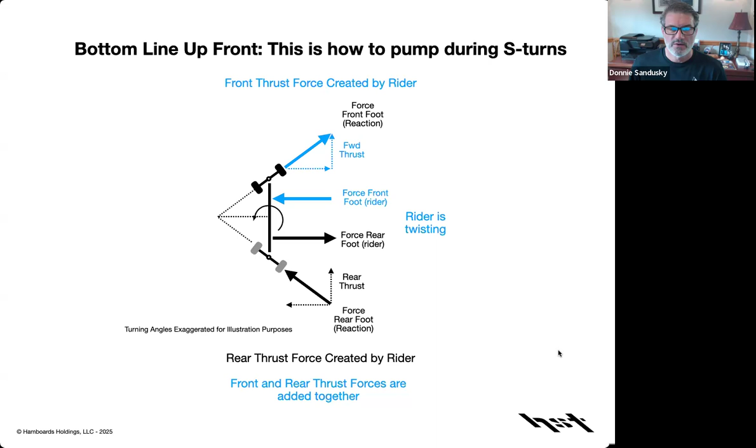This presentation is the physics of flow. Let's get on with it. How longboard skaters generate thrust without foot pushing. The bottom line up front is that during S turns, the rider pushes in opposite directions with their front and rear foot, basically pushing that truck in the direction it's already turning in opposite directions, resulting in a rear thrust and a front thrust, which are added together, which propels the rider forward without foot pushing. But the rider has to be twisting.

To define a few terms, longboards are specialized skateboards that the rider can turn by leaning without the need to lift the front wheels off the ground, like with regular skateboards. I know you can loosen up regular skateboards and turn them, but just bear with me. Longboards are considered counter-phase turning mechanisms.

Here we consider three center of turning categories: centered, back foot, and rear axle. That means, where does the board actually turn? What is the pivot point of the board as you're riding it? This correlates to different riding styles: centered carving, back foot carving, also surf skating, and pumping.

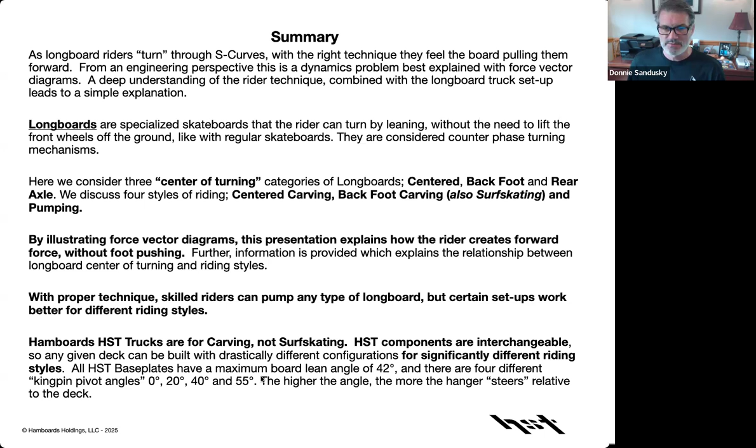Okay. I'll show you some force vector diagrams. I'll show you about the technique, and I'll talk about how the HST truck system, which is designed for carving, not surf skating, all the components are interchangeable, and you can try all these different riding styles.

Centered longboards, the midpoint of turning is at the middle of the wheelbase because the front and rear turn equal and opposite. Back foot longboards, the center of turning of the system is underneath the back foot because the front turns more than the rear. The rear axle longboards only turn in the front, so the center of turning is right on that rear axle.

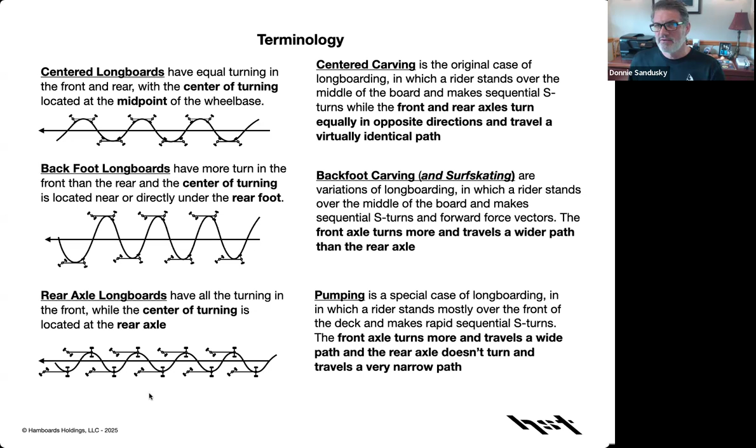And these three different types of longboard setups correspond to centered carving, to coin a phrase, back foot carving, again, coining another phrase, also surf skating, and then pumping, where the front of the board does all the work. You can pause this if you like to read the details, but I've tried to organize these different styles in terms of mechanics, stability, technique, and feel.

Long story short, center carving is what Hamboards have always been. I have seen people crush pumping on our centered carving boards without having a foot push. They're insane. Back foot carving is where the front's turning a lot more than the rear, and so the front of the board is taking a wider path. Pumping is standing right on the front truck and just making it go.

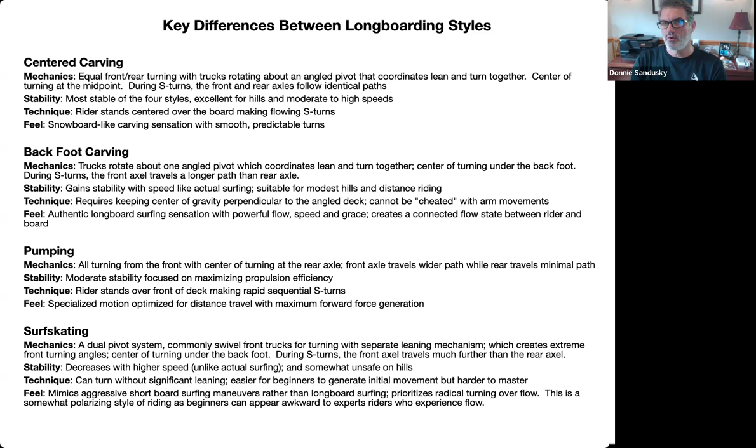And surf skating is just like back foot carving, except the turning and leaning axes are not perfectly coordinated. In some cases, there's two different axes for turning and leaning. Whereas in back foot carving, the turn and lean are coordinated according to a very basic geometry.

A quick aside, surf skate coaches often recommend that their riders push harder with their rear foot, which is the right coaching, and it may lead to a counterintuitive result, which is, in order to push harder on your rear foot, you have to have an equal and opposite reaction somewhere. So that means you end up pushing much harder on your front foot to get more push on your rear foot. I'll talk more about that in a second.

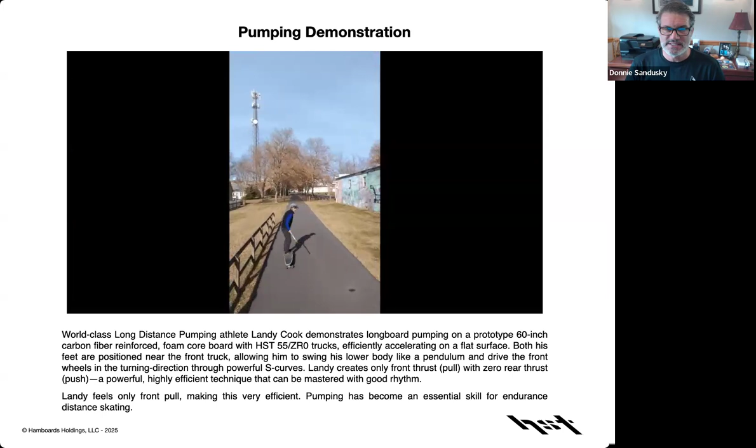This is Landy Cook, who's pumping. He's a world-class LDP athlete. He is standing pretty much over the front truck. Both his feet are pushing the truck in the direction it's turning. Notice how the rear truck is pretty much following the line that he's traveling. So you might call it a dead rear end, and the front is doing all the work.

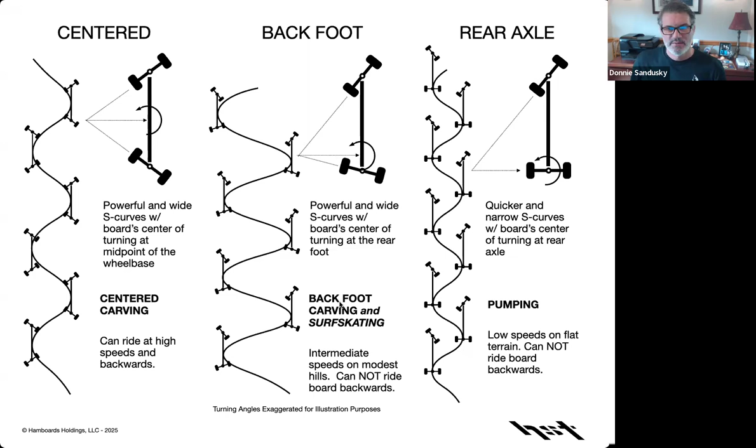Centered, back foot, and rear axle are board setups, okay? Why do I call this centered? Well, because the front's turning this way, the rear's turning that way, and where these two lines intersect, it's at the middle of the board. Back foot, this turns this much, that turns that much. Where they line up is near the rear foot. Rear axle, where they line up is under the rear axle. Again, centered, center carving, back foot carving, rear axle, pumping.

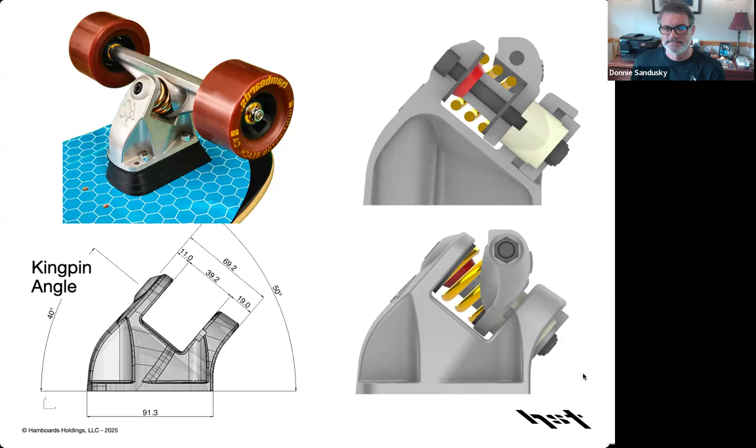This is different than surf skates that have basically two pivot axes, where turning is separate from lean. That's why I draw the distinction between back foot carving and surf skating, even though the technique is the same.

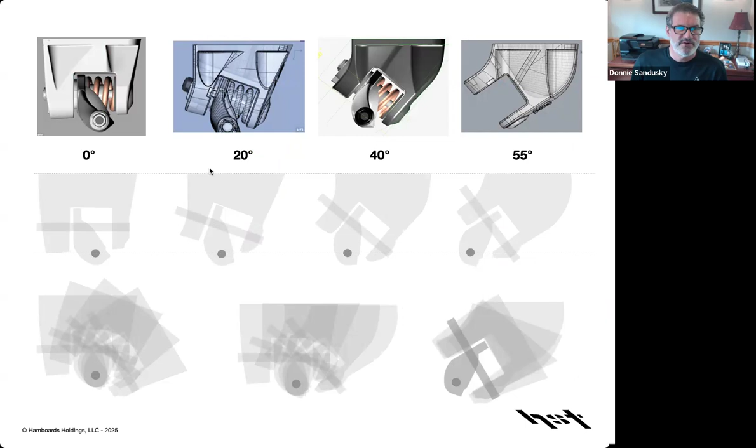Here we have side views of the trucks. I won't take too much time on here, but I have a 0 degree, 20, 40, and 55 in this truck. This is what they look like. So here, remember that kingpin angle I was talking about before? For the 40 degree, you get 27 degrees of board lean and 23 degrees of axle turn coordinated. If it was 45 degrees, those two numbers would be the same.

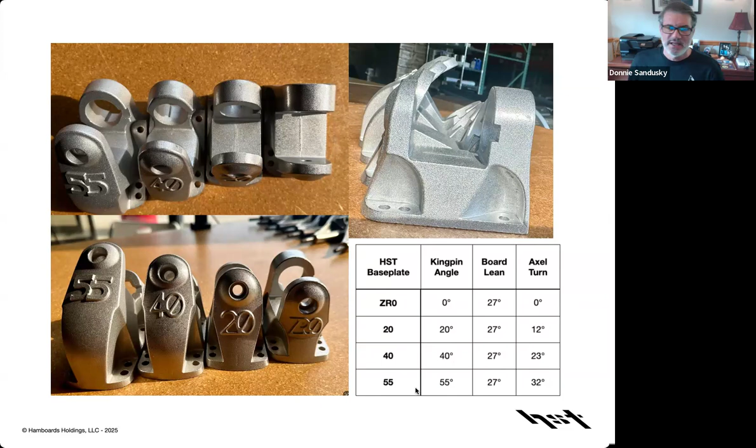For 20 degrees, I get half that much. For 55 degrees, I get more. So if you lock in a number in your head, the 0 turns 0, the 20 turns about 10, the 40 turns about 20, the 55 turns about 30. I used easy math for the rest of this chart.

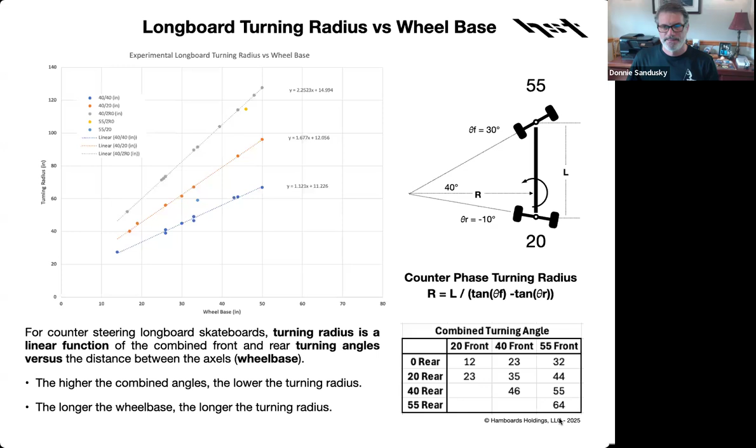This is the fun chart. Okay. Most Hamboards have been centered carving boards with a 40 kingpin on the front and a 40 kingpin in the rear. Essentially, this turning radius of the board is 1.2 times the distance between the axles, which is about the length of the deck. So turning radius is about equal to the length of the board.

The 55-20 setup we have is also about 1.2 times the wheelbase, but that's a back foot turning carving board. So we're calling those intermediate skill level. And if you really want to get adventuresome, you can try a 55-40, which its turning radius is less than the distance between the axles. And some of these are crazy.

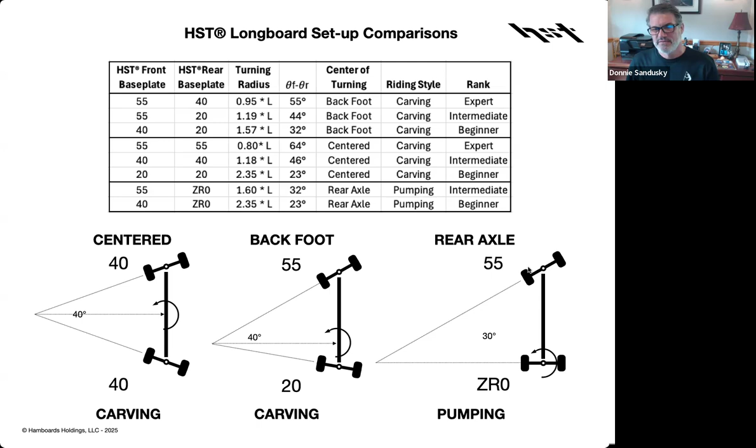And a 40-0 or a 55-0, which is used for pumping, that could be much longer than the length of the wheelbase. But this is generally how this works. The centered about 40 degrees, 55-20 back foot about 40 degrees, 55-0 back axle about 30 degrees.

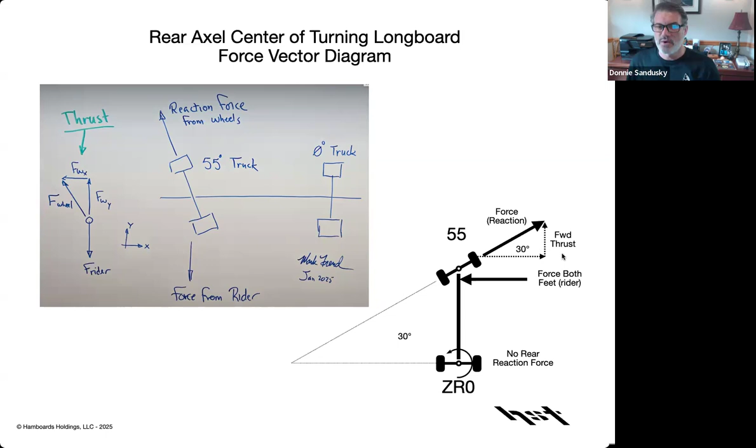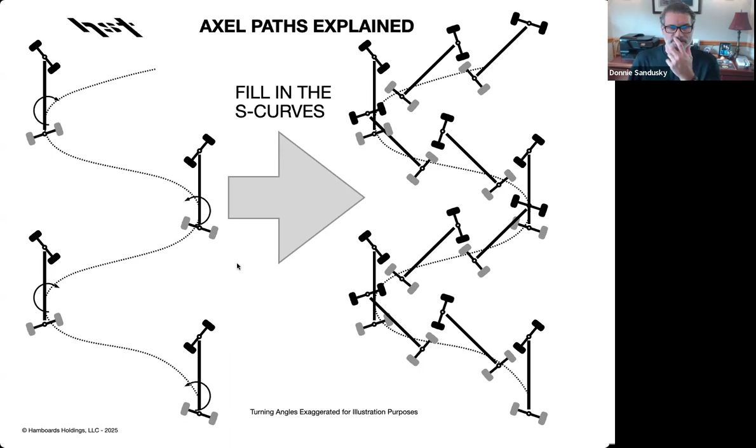So let's talk about axle paths. This is a rear foot board going through S turns, turning counterclockwise, clockwise, counterclockwise, clockwise. And let's say we fill in that gap with all these decks, okay? Then we draw a gray line through the rear axle. We draw a solid line through the front axle.

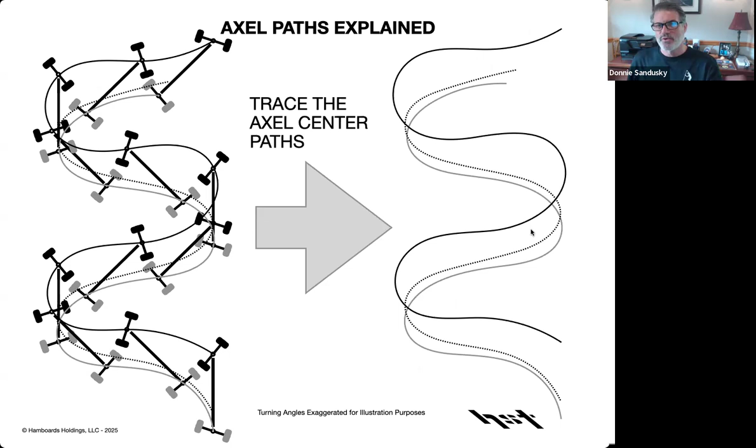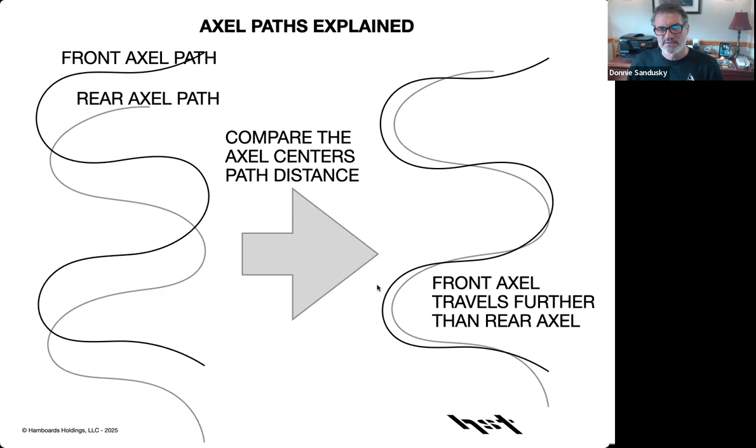Now I get 3 curves, okay? And then I get rid of the center of turning line, and now I just have the front and rear axle, and then I line them up. You can see here that the front axle is traveling a wider path than the rear axle.

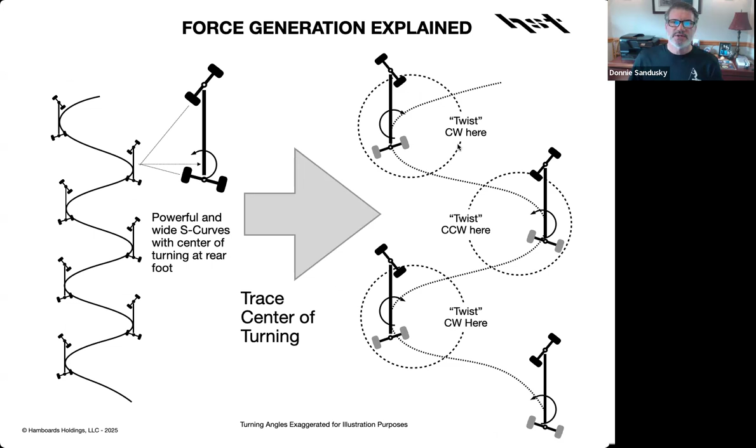Now, in order to create force, the rider needs to twist clockwise here, twist counterclockwise here, twist clockwise here. It's the twisting, because if you don't twist, you're cruising. If you go into a turn and you just push out with both feet, it's super fun. It's like spilling speed on a snowboard and getting your edge in. It's so fun. But don't expect to create forward thrust that way.

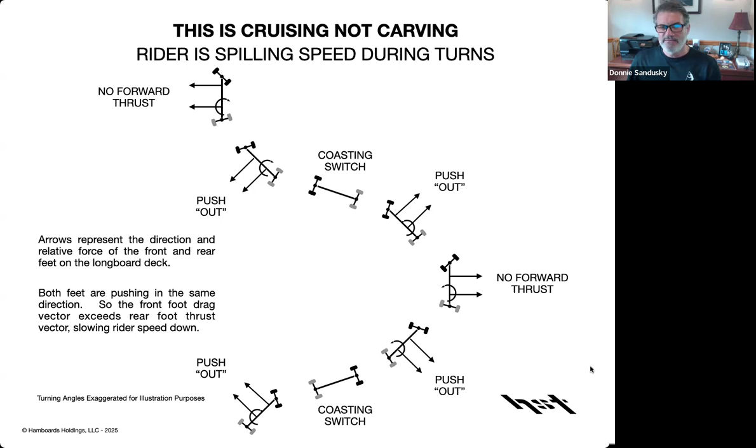All right. Now, if you push in opposite directions, you create a forward thrust with the front to add to the rear thrust from the rear. If you're cruising, you're going to create a drag force vector with the front. And you can pause this and look at the force vector diagrams. The only difference between left and right, other than the color, is the direction of this arrow. That's the direction that the rider is pushing.

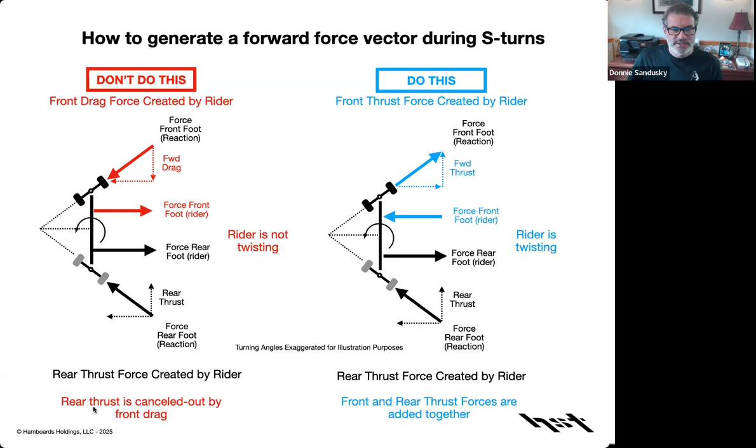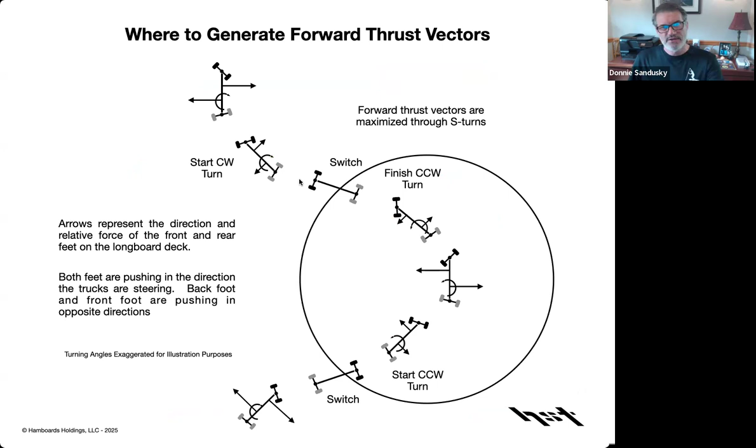Okay? So to create forward thrust, the rider twists and front and rear thrust are added together. If the rider's not twisting, they're cruising. The rear thrust that they get for free is canceled out by dragging the front. And here's where you do it in the turn. You come into a turn, you're at switch. Now you start twisting, pushing feet in equal and opposite directions, and then you switch to clockwise on the other dimension.

If I blow this thing up and get real specific and put numbers in, I can actually calculate how much forward thrust a rider can generate on, in this case, a rear foot longboard with 30 degrees in the front, -10 in the back. If the rider pushes in this direction with 10 pounds force and an equal and opposite 10 pounds force there, because otherwise, how are they going to get leverage? It's got to be equal and opposite. They can generate about 3.7 pounds of forward thrust.

So this plus this equals 3.7 pounds. Turns out that about 3.3 of it is front pull and 0.4 pounds is rear thrust. So it's about a 90-10 ratio. In this little table down here, I've done some calculations. So if a rider can make 10 pounds force left and 10 pounds force right, depending on the geometry of their setup, they can create between 2 and 5 pounds of forward thrust every single S-turn.

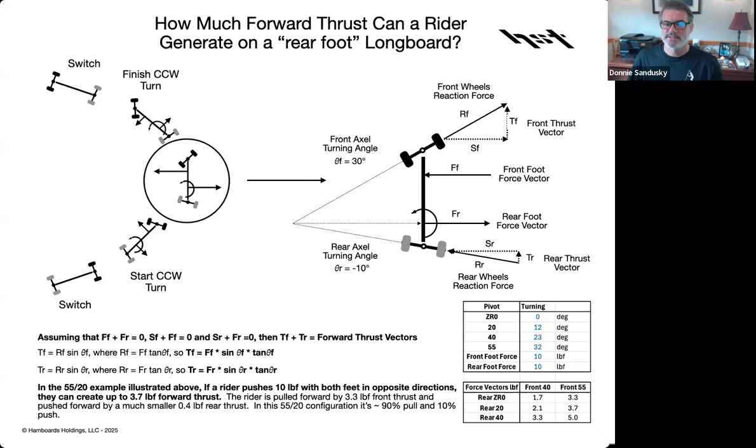Coming back, the centered, back foot and rear axle force diagrams look different because in the rear axle, they can use both feet to make a much bigger force vector in that direction, resulting in a much bigger resultant force. And so they can get quite a bit of power out of a rear axle system. Similarly, for a centered board, if you do it right, you can get a really big forward thrust and a really big rear thrust that pretty much comes along for free.

And I've seen people riding longboards and Hamboards that are centered, crushing, making speed without foot pushing because they know how to twist at the right moment on each turn. Back foot boards are actually, frankly, easier to learn how to pump because all you really have to do is think about the front foot, right?

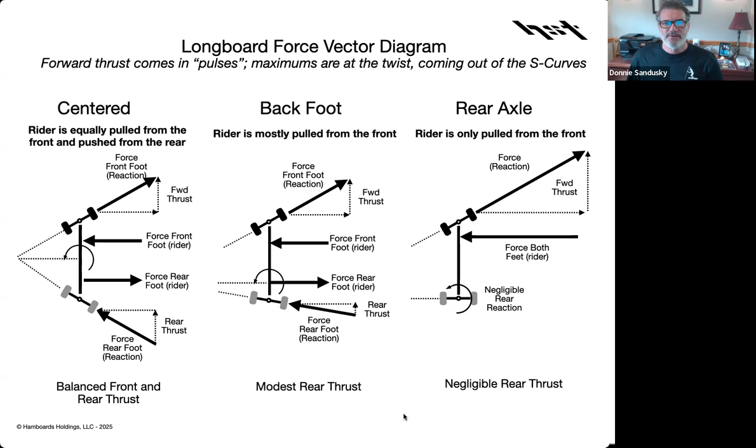So to recap, riders can generate forward thrust on any type of longboard. That's what we call carving, okay? Center of turning location is critical. Centered longboards can get equal front pull and push from the rear. Back foot longboards get mostly pull from the front, less push from the rear. Rear axle longboards are pretty much 100% pull.

And the HST truck systems are for carving. They're not surf skate trucks, because the turn and the lean are coordinated geometrically. Surf skates have separate axes for turning and leaning, and they're really fun. It's just different. But the HST truck system is interchangeable and modular for any of these setups. It all works.